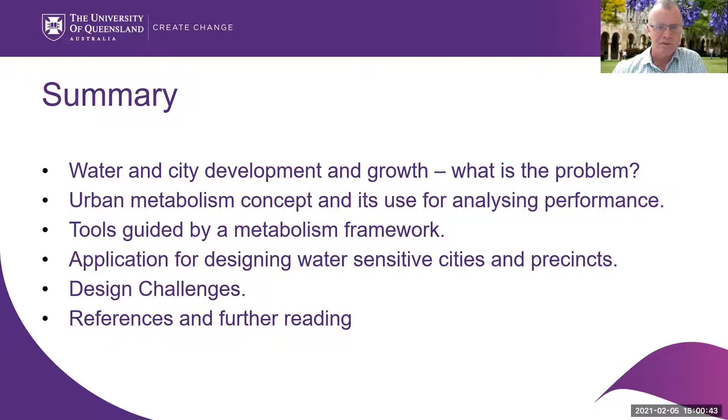In summary, I'd like to talk about water, city development and growth, and what is the problem of water in cities as they're growing. I'd like to talk a little about the urban metabolism concept and its use for analysing performance of cities and how they're managing water holistically. I'd like to talk a little about tools guided by the metabolism framework and its application for designing water-sensitive cities and precincts. I'd like to briefly mention design challenges and give some references if you're interested in these concepts further.

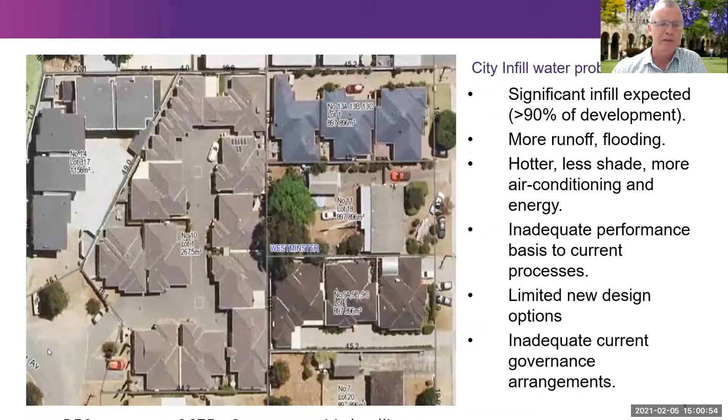So what is the problem of water in cities? I particularly look here at the issue of infill development in cities. Infill in cities is expected to be significant as cities grow and they're constrained on their outer edges by other land uses. In many Australian cities, about 90% of the expected development is infill, more intense use within existing allotments and going higher, etc.

And what that's meaning is increasingly large areas of impervious surface, roof area, road area, driveway area, and less green space, less and less opportunity for water to get into the soil. That makes more runoff, more stormwater runoff, which leads to downstream flooding. And it makes our cities hotter because there's less shade, meaning a need for more air conditioning and energy.

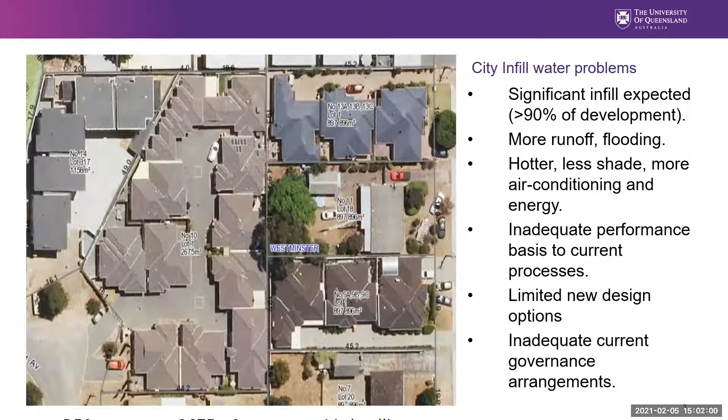And some of the problems we have with this is we don't have in our current urban design and assessment adequate performance bases to assess these designs and developments. We also have limited new design options and inadequate current governance arrangements to really manage this problem, which is continuing to grow. So there are a range of key questions related to this problem.

How can we actually quantify the performance of these cities or subsystems within cities? How do we define that? How do we measure it? And how do we assess it?

For example, across water, energy, and nutrients. What is the impact on hydrology, heat, and livability of new design options? How can best or optimal solutions be found? And how much do we actually change cities if we're changing things little bit by little bit?

There's a related question: so what information is critical to solutions? What technologies suit different typologies or types of households and scale? And how does governance or policy or management approaches work or fail? And how can greater success be achieved?

I'd like to talk a little bit about the concept of urban metabolism and how it's relevant here. A hero in this space is Abel Wolman, who over 50 years ago published a fantastic article in Scientific American about the metabolism of cities.

He published that as a concept to simultaneously deal with shortages of water, pollution of water and air, largely because a lot of energy generation was back within cities and it led to smog and particulate matter, and related public economic decisions. So he presented it as three-dimensional flows of matter through cities: the quantities of water, food, fuel moving into cities, and the quantities of sewage and refuse moving out.

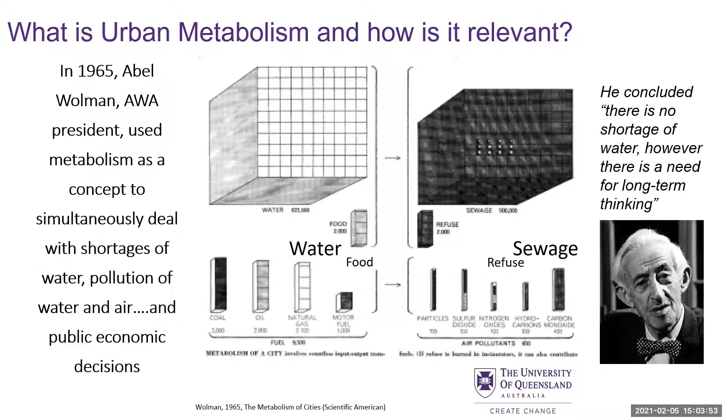That work on metabolism has spawned a whole series of research over the following 50 years. Our application of it is to use particularly the mass balance, the quantification of material flows through cities. And we use that to quantitatively analyse and demonstrate how wasteful and poorly designed our cities currently are.

So this is an example of Melbourne, which is actually a world-leading water-sensitive city back in the time of the Millennium Drought when it was famously running out of water. Back at that time, around 2010, centralised water supplies of around 365 gigalitres, or 365 billion litres of water, were coming in from piped water outside the city. And from that, nearly 297 gigalitres of wastewater was flowing as waste.

The rain falling just on that urban footprint each year was some 1,400 gigalitres, and some 1,200 gigalitres were evaporating from the city. It was only reusing around 31 gigalitres of wastewater, so well less than 10% of its demand.

So we used our performance indicators, which you can see down the bottom, to demonstrate that if Melbourne could be designed to capture and reuse all its wastewater and all its stormwater, it could meet a very large percentage, 81% and 127% respectively. Obviously there's design and infrastructure challenges, but conceptually it's a very large proportion of Melbourne's water supply that could be from within.

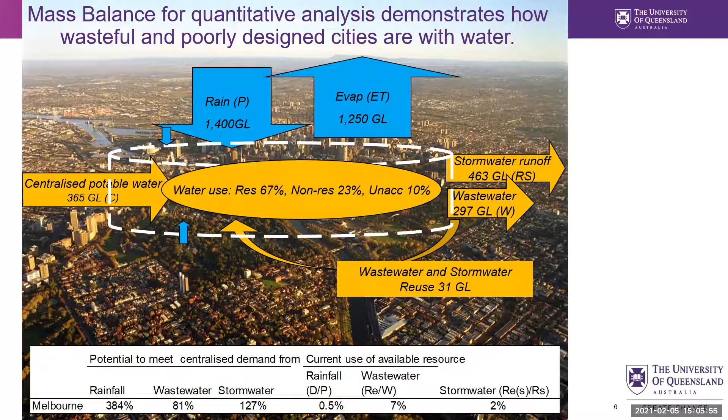So you can see from these mass balance numbers just how wasteful our cities are currently designed with regard to providing water from within, or acting as water supply catchments in their own right.

Before I go further, I'd like to talk a little bit about language - about urban metabolism, urban water metabolism, and water mass balance. So at its broadest, urban metabolism is about all flows of water, materials, and energy through cities. If we look at a subset of that and look at urban water metabolism...

So before we move forward, I'd like to articulate some language: the language of urban metabolism, urban water metabolism, and water mass balance. At its broadest, urban metabolism covers the mass balance, or flow of materials - all materials, water and energy - through cities.

Urban water metabolism focuses on all water flows and the related influence on energy and materials. And some of those related influences are interconnections outside cities or within cities. We hear the term the water-energy nexus - so some energy is influenced by water, and some water is influenced by energy.

If we look at water mass balance, we are only focusing on H2O molecules and how they flow through cities. And over on the right-hand side, you can see the letters C, B, and B, which is performance assessment - so how do we quantify the performance? How do we put ratings on how well designed cities are?

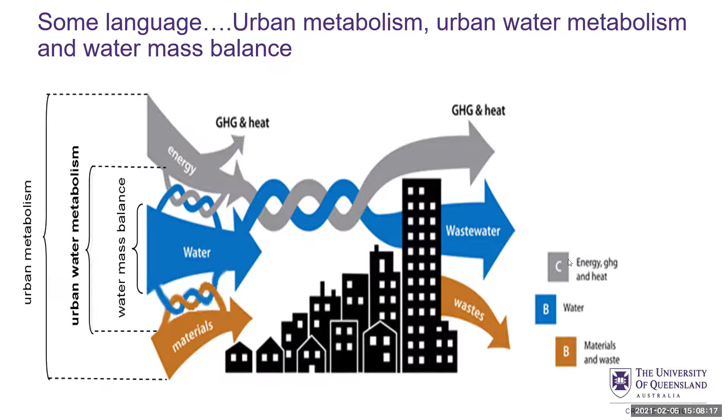Metabolism and mass balance is a fantastic way for doing that. Moving forward, we transform cities and measure their improvement.

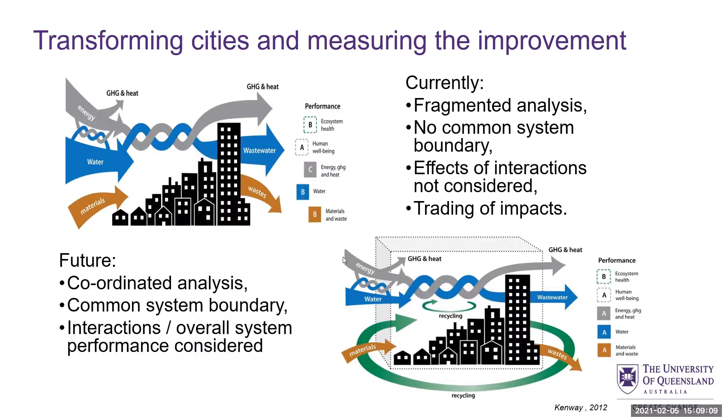The current paradigm is on the top left, where we have energy, water, and materials flowing through cities, but with relatively misaligned performance indicators of ecosystem health, human well-being, energy, water, materials, and waste. They're commonly assessed for cities, but not necessarily to a consistent system boundary. So there's currently fragmented analysis, no common system boundary, the effects of interactions often not considered, and consequently there's trading of impacts. In future, we'd see much more coordinated analysis to a common system boundary, factoring in and accounting for those interactions like the water, energy, food nexus in much more detailed quantification.

The main project I'd like to talk about now is with the CRC Water Sensitive Cities, created by the Commonwealth Government between 2012 and 2021. Water sensitive cities are seen as more sustainable, livable and resilient, very similar to blue cities or sponge cities or other similar concepts internationally. This CRC has over 80 partners in Australia, and we've been fortunate to work on 2 major projects with them.

In essence, a water sensitive city helps provide water security for economic prosperity through efficient use and diverse available resources—really maximising the functionality of water. It enhances and protects the health of waterways, wetlands, river basins, coasts and bays. It mitigates flood risk and damage, and creates public spaces that collect and help recycle clean water.

Here are some examples of water sensitive elements within cities being built in my hometown, Brisbane, in Coorparoo.

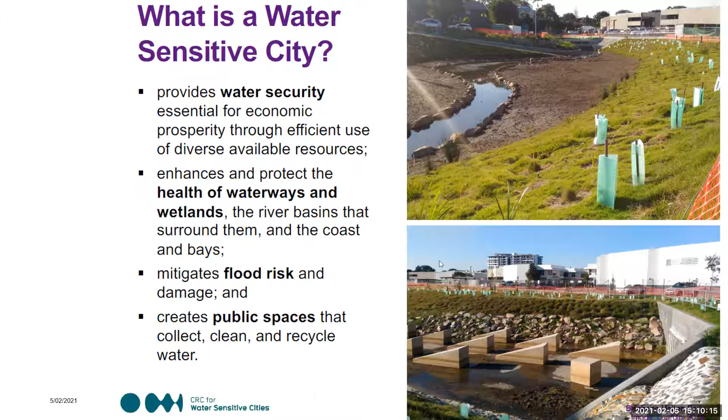As I'm talking about models, I briefly wanted to mention the models used to quantify performance, because that's the focus here—if we can quantify the performance of cities, we can design them better. This is recent work published by our PhD student Mojtaba Moravej, where he reviewed all urban drainage models, urban water mass balance models, and integrated water systems models, looking particularly at tools that cover all of those flows in a mass balance sense.

So all the water cycle flows, including P (rainfall), ET (evapotranspiration), stormwater, recycling, centralized water supply, and wastewater, but also mitigation opportunities—technologies like rainwater harvesting, stormwater harvesting, wastewater reuse, and green roofs. These can also drive performance indicators at different spatial scales from site to precinct to city. He looked at the suitable methods to really evaluate the design of cities.

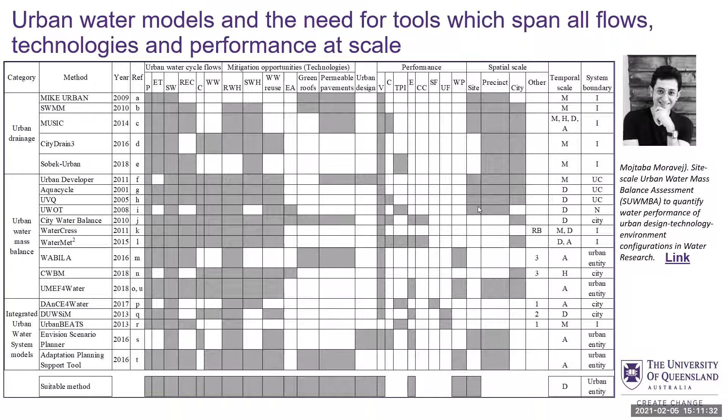These grey boxes at the bottom cover all water cycles and all mitigation opportunities, particularly relevant at site scale, because so much design and development occurs there, applying upwards to precinct scale. Mass balance is so helpful here because it helps unpack a 3-dimensional entity—the design—which interacts with all flows of water. Understanding the mass balance is essential for water performance, very different to doing a mass balance of a 2-dimensional space.

A mass balance needs to look at all inflows to, all outflows from, and all water stored within that particular entity. This is very different to approaches that do a mass balance for a pipe, where all flows into the pipe equal all flows out. Water utilities do that regularly to make sure they're not losing water, or they do it for more complex systems like networks, catchments, or storages.

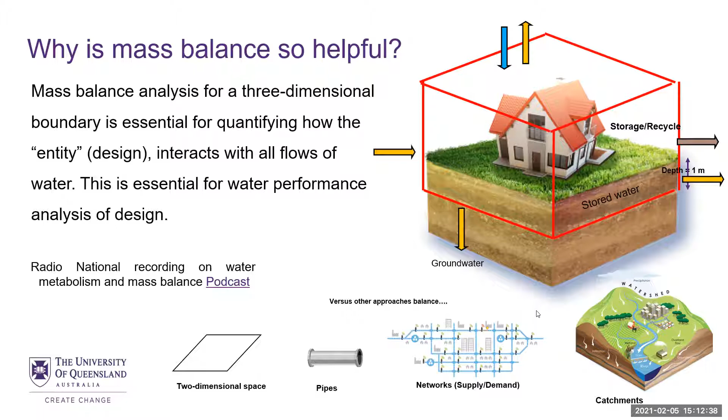But doing it for a 3-dimensional entity involving a building or set of buildings, a landscape with drainage, soil and vegetation, and infrastructure elements like rainwater tanks or pipes, plus human behaviour, becomes much more complicated.

An evaluation framework we've created to assess the performance of cities has been recently published by the CRC Water Sensitive Cities, available on the link. Essentially, the way we evaluate the performance of cities is to define the area and the infill scenarios—we'll talk a lot about the existing state, the business as usual state, and the alternative infill state.

The next step is the definition of the parameters—are we interested in environmental parameters, built form, urban design, or water servicing? Once we have the information and data for those parameters, we undertake an urban water performance analysis, an architectural and urban space analysis, and an urban heat analysis. I'll mostly be talking about the water performance; our colleagues in architecture and microclimate handle the architectural and urban heat analysis, but they are highly interrelated with water performance.

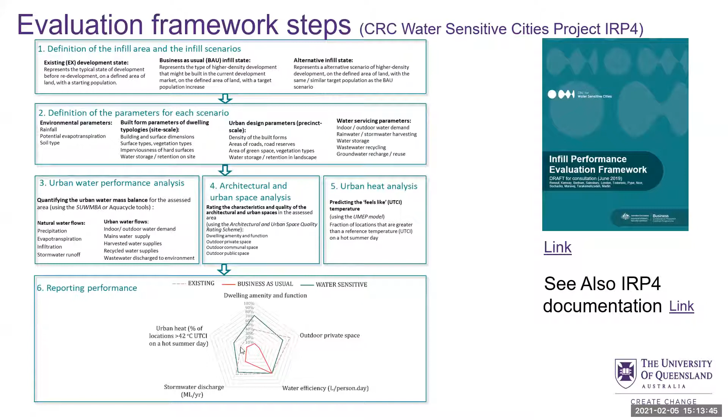We represent these on radar graphs, which I'll describe in this presentation. In brief, the infill performance evaluation framework works through design parameters. Typically planners and architects work with things like roof surfaces, car parking, paved or vegetated surfaces. They look at midpoint indicators of hydrology, water storage, or water resources management, or heat, and then endpoint indicators like infiltration coefficients or evapotranspiration coefficients using different quantified models.

But the consumers, the people who live in these households, are more focused on the right-hand side. They're interested in the outcome for them around livability, water, heat, or amenity. Will it flood? Are there green spaces for children to play? How resilient will it be for drought? How hot is it, and is it a nice place to live in? That's also published on the CRC website, with a link at the bottom there.

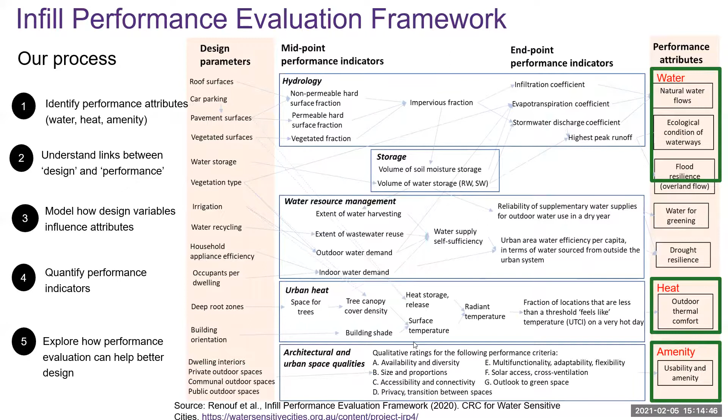So we bring together water mass balance to assess existing, the business as usual, and design. We put a three-dimensional boundary around those cities going down to about 1 metre deep, to characterise the influence of the city and the design, and how that impacts flows of water demand, precipitation, evapotranspiration, stormwater runoff, wastewater, and infiltration.

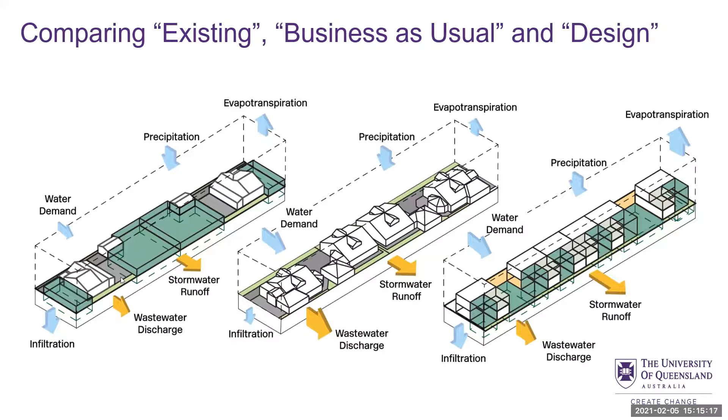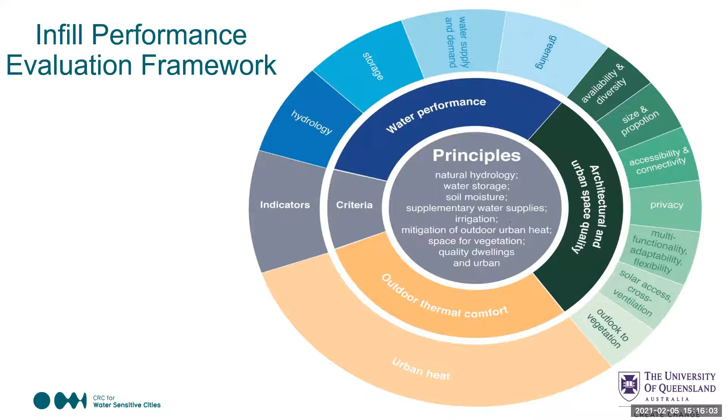The framework has core principles around wanting hydrology to be as natural as possible, storing water, using soil moisture, using supplementary local water supplies and irrigation to help mitigate outdoor and urban heat, space for vegetation, and quality of urban dwellings. There are criteria covering water performance, architectural, and urban and outdoor thermal comfort, and a set of indicators for water performance spanning hydrology, storage, supply and demand, and greening, and architectural quality tracking the quality of interior space, public space, and private outdoor space.

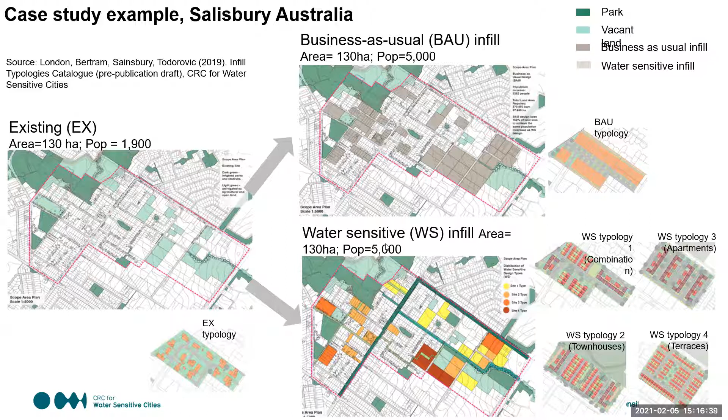We've got case study examples to see the application of that for existing development. You can see here the pink area, an area of 130 hectares in Adelaide, at Salisbury in South Australia. Business as usual, we could quantify which areas were likely to intensify, similar to the earlier slide, and what that would mean for stormwater and urban heat. We could quantify the population for water sensitive infill development, with all cases growing in population from around 1,900 people to 5,000 people.

Then we can compare the performance using the evaluation framework. Here are examples of the numbers: 100% at the outer boundary of the circle is a good number, and 0% means a bad number. Business as usual, you can see its performance with regard to numbers of households, water storage capacity, urban heat, architectural quality, hydrology, greening, water supply and demand is quite restricted, generally less than 50% within this particular framework.

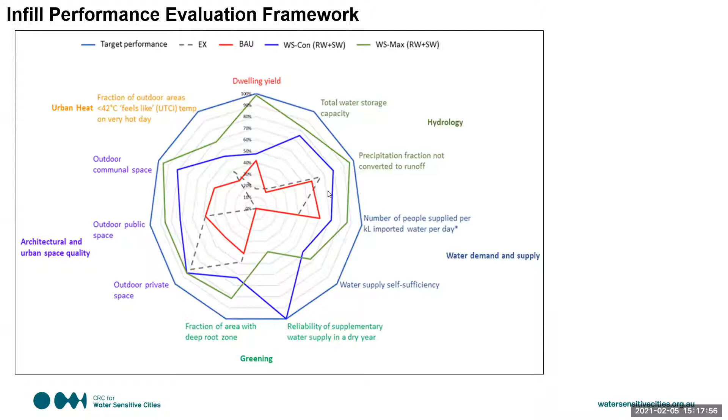When we look at the water sensitive case, red is the business as usual, and the grey dashed line is the existing case, which has a large amount of outdoor private space, a strong performance indicator there. We compare that with water sensitive conservative, which involves rainwater and stormwater harvesting, and water sensitive max, the maximum water sensitive application. We use that to quantify how the performance of that development is improving, then feed that back within architectural and design teams to look at the trade-offs occurring, and how we optimize the design of that development across those multiple attributes.

This has helped us identify a set of principles underpinning the evaluation of water. In hydrology, we want designs to not cause further adverse impact on hydrological flows. We want to restore, ideally, the hydrology towards the natural case. In some cases that restoration is possible; in many cases it's not, but we can certainly stop it deteriorating further. There's a range of performance criteria we can use for that. We can look at water resources efficiency.

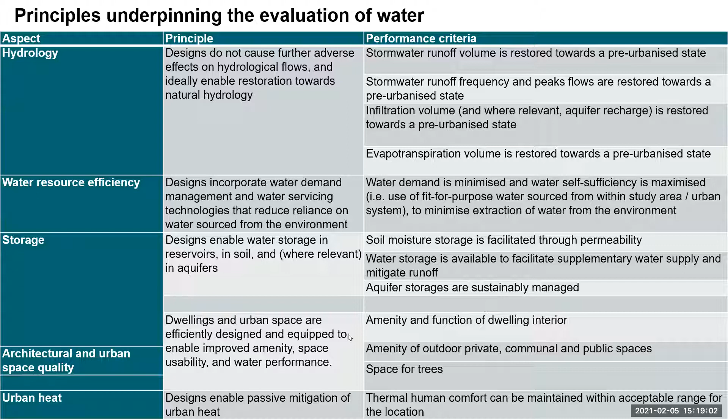Those designs incorporate water demand management and servicing technologies that reduce reliance on water sourced from the external environment and optimize internal or local harvesting of water. Water storage is critical, particularly so that design enables storage in local reservoirs and soil, and that the dwelling and urban space are efficiently designed and equipped to improve amenity and usability. Lastly, design for urban heat enables passive mitigation of heat, which is becoming increasingly important.

We've also found that there are many links between water security and livability. While this shows conceptually the links, we're now working to quantify many of those links in work by our PhD, Beata Sochacka. Briefly, some of the key links between water supply, sanitation, drainage, affordability, river health and risk has key linkages into essential services, green space, utility-owned green space, water quality of natural water bodies, etc. So livability can be very strongly influenced by water.

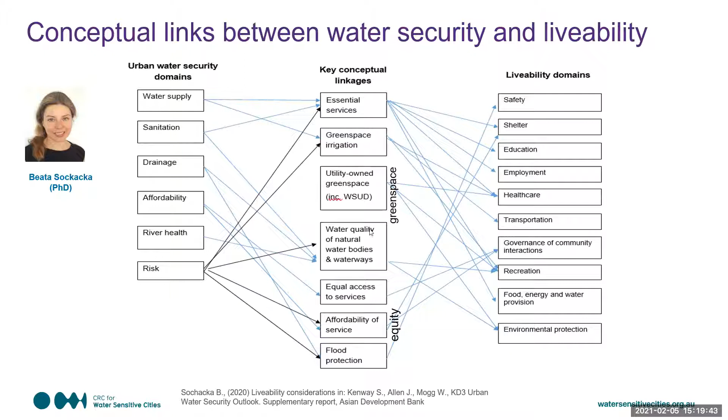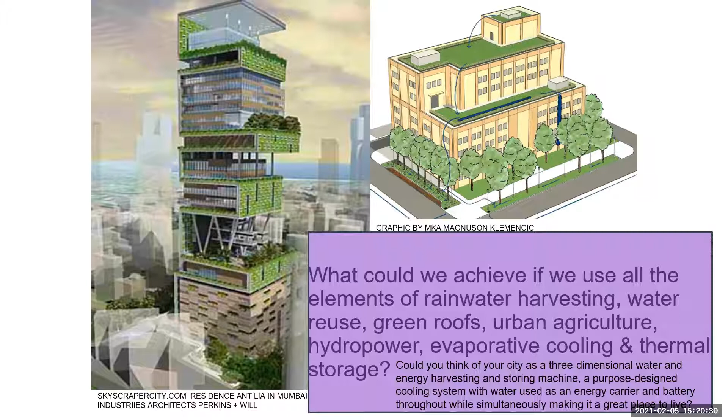When we put all of this together, and particularly when we bring in the water energy nexus, we can start to ask - these are very conceptual drawings of green skyscrapers and cascading water use and harvesting in different level buildings. What could we achieve if we use all the elements of rainwater harvesting, water reuse, green roofs, urban agriculture, hydropower, evaporative cooling, and thermal storage? If we think of our cities as a three-dimensional water harvesting machine, an energy efficiency machine, a purpose-designed cooling system with water used to carry energy throughout while making it simultaneously a great place to live, then we can start to design better cities into the future.

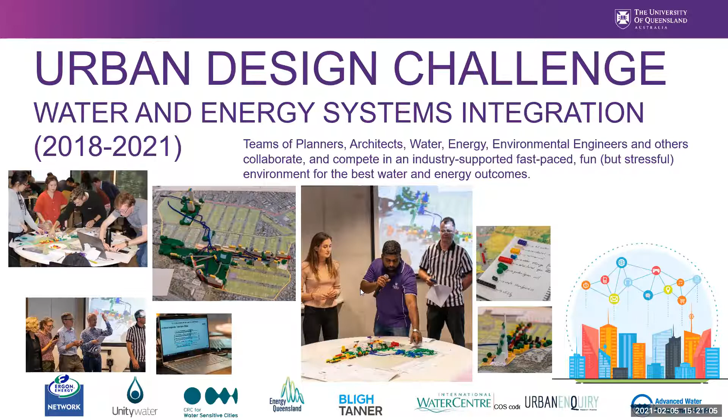At the University of Queensland, together with other partners, we have put together a design challenge that brings together teams of planners, architects, water, energy and environmental engineers and others to collaborate across a week in a fast-paced, fun environment to achieve design solutions. We're using that as an experiment to look at alternative designs, and the students build fantastic designs and market them on the multiple attributes of water, energy, and livability.

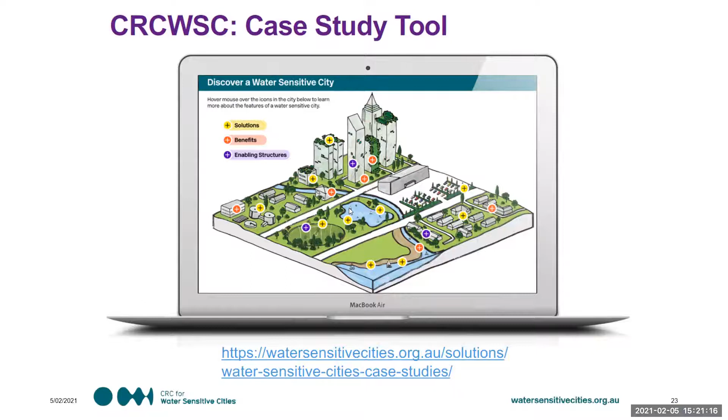There are other tools available too, multiple other tools, particularly the CRC Water Sensitive Cities case study tool, which is available from the link shown on the screen.

To conclude, I'd like to say that our cities are not currently well designed. Parts of them are, but certainly holistically they are not. They're hydrologically wasteful and damaging. Resolving this is a major challenge requiring multidisciplinary inputs from planners, architects, engineers, environmental scientists, social scientists and economists at least, and other disciplines. Water sensitive design, both land use and built elements, can enable intensification, more people living in cities, but also retain or improve hydrology and create more livable forms.

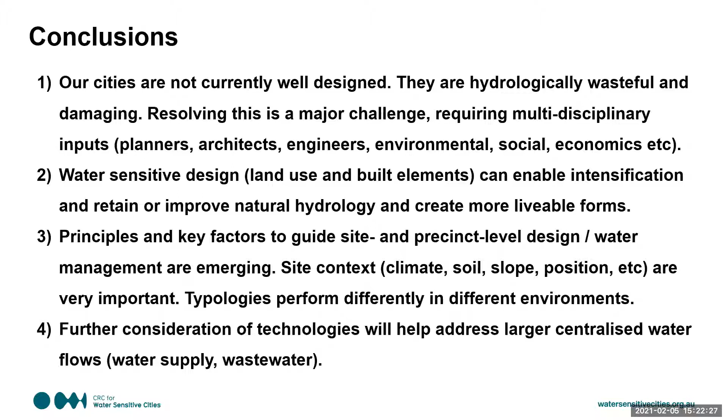Principles and key factors to guide both the site level and precinct level design are emerging. They include site context, climate, soil, slope and position, which is very important. Typologies or designs perform differently in different environments. Further consideration of technologies will help address larger flows of centralized water, because if you're putting more people within cities, you can harvest water locally, but it also puts a further demand on the centralized water system to supply that area.

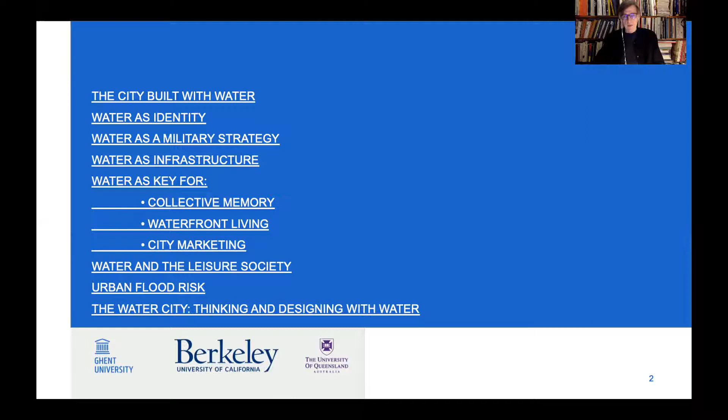Water is here at the origin of the morphology of the city. Ghent is situated on the confluence of two rivers in a marshy lowland, and you can read the presence of water almost in the morphology of the city.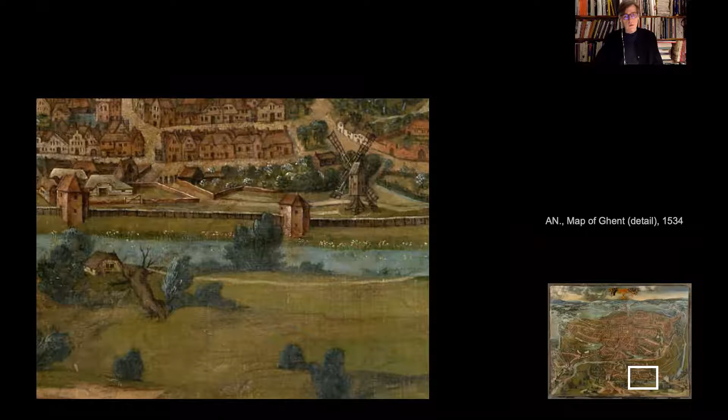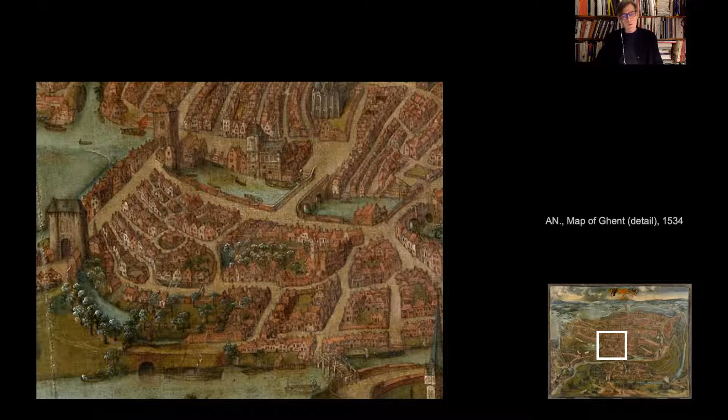This detail shows how water flows under bridges and tunnels, and these bridges can also be gates or fortified gates. So the inhabitants are dealing with water to build their city upon the water.

Another small detail in the map shows how streets run down from the hill towards the water, giving access to the water for domestic use. This is important, so people have access to drinking water or other uses of the river water.

There is a harbor in Ghent. You can see quite big ships here coming from the region, out of the region, into the heart of the city.

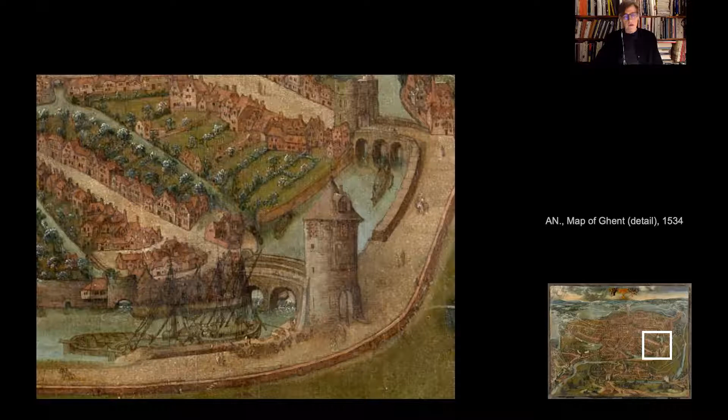But you also have very small ships and boats used for local urban transport and unloading and loading at the steps, as you can see here, of one of the streets in Ghent.

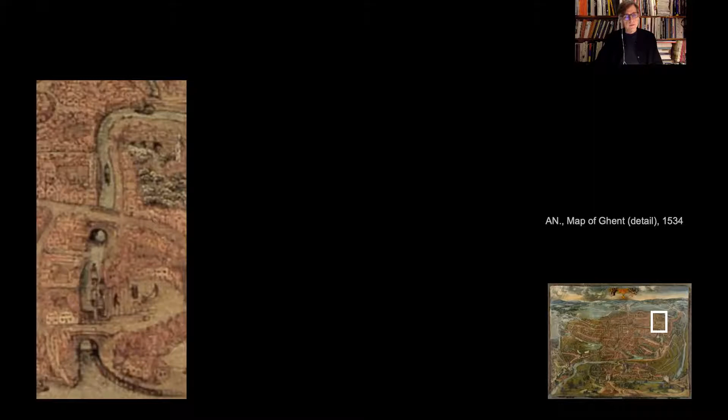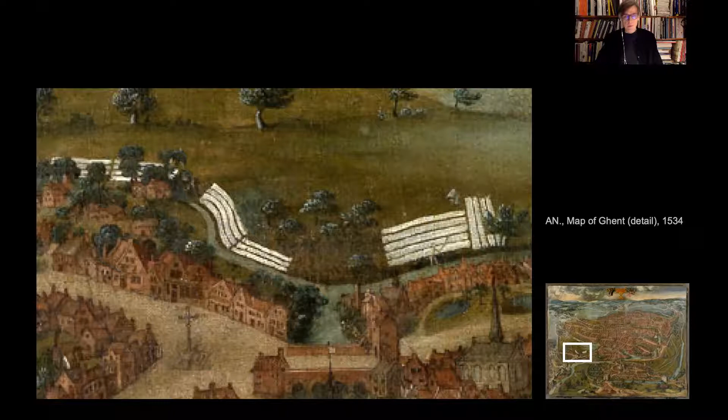The river is also used for washing and bleaching laundry in the meadows close to the river, another type of domestic use. And here, two people are fishing in the river, so it provides not only drinking water but also food for the people living there.

Just to situate the city of Antwerp, which is a large harbor and international port today, but which is not close to the sea, it's inside the land about 80 kilometers. I think it's good to know this. But Antwerp has always been a harbor, at the lower lee side of the river, in the meander of the river.

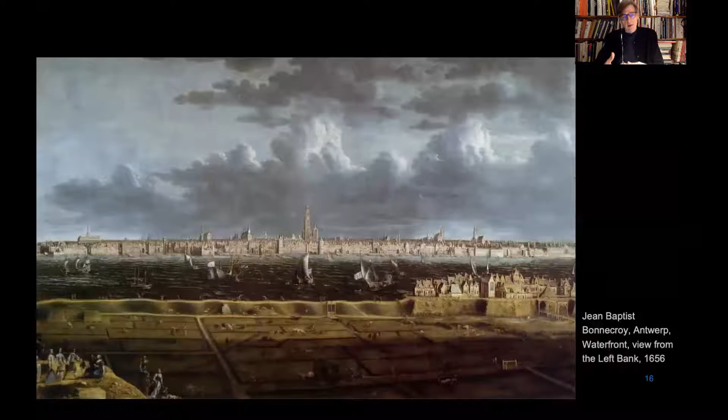Same in this picture: the waterfront side is again represented as the most important side of Antwerp. It's a beautiful picture with a very special light, actually drawn from what they call the left bank, the other bank at the other side of the river, looking over the river towards Antwerp.

What you see here is a division into strips of the painting, with 4 or 5 horizontal strips. The first strip is the agricultural land—we are standing here in Flanders. The river is the border of Flanders with the other region, Brabant; Antwerp was in that time still part of Brabant. So the river is not only a place of harbor activities, but also an administrative border between two important regions. So you have a strip of agricultural land, a strip of the river, a strip of the city of Antwerp, and then a strip with a huge cloudy sky.

At the left side, you see some people standing there, like us, looking at this spectacle of Antwerp. It's a painting of the 17th century by Jean Baptist Bonnecroy.

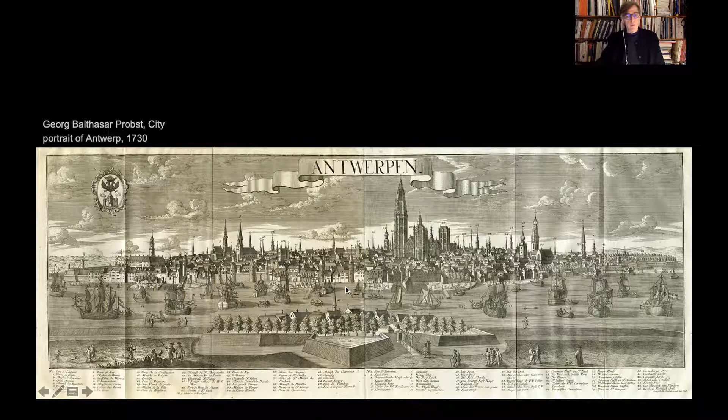In this image, the waterfront of Antwerp is represented in its most glorious way, with all the important ships on the river, huge fortification walls, some new extensions at the left and right sides, and all the monuments inside the city with the cathedral in the center. This is what they call the portrait of the city of Antwerp—an urban portrait that wants to emphasize the presence of the water and the river Scheldt, the birthplace of the city of Antwerp.

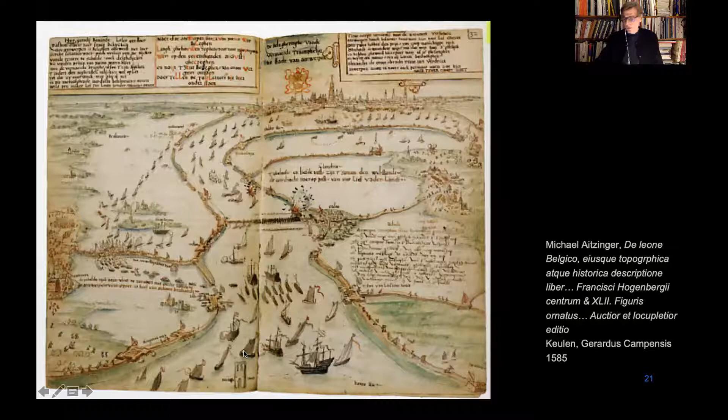The whole surface you can see here is several hundred square kilometers. The ships are, of course, out of scale, and this makes this drawing something very particular. This is the same battlefield, but represented 100 years later by Jan Luyken. Again, you see the city of Antwerp over here at the left side.

This is the River Scheldt, and then all the inundated areas in the polders around the river, where the battle with the ships could take place. Of course, the peasants and the cattle living there were not very happy with these military activities, but that's another story.

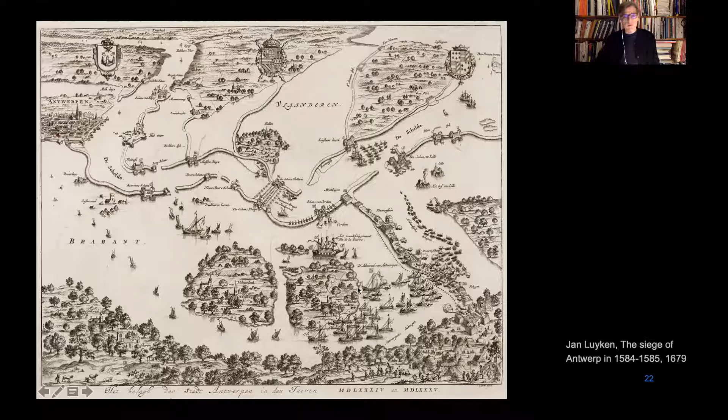Now, using water for military strategy was not so exceptional. I show here at the left side a map of a large part of the Netherlands, what is called the New Holland Waterline. It was a defense strategy for the Netherlands on the east side, because Germany was to the east, and they wanted to defend against Germany in those centuries.

And the strategy was to have a system to inundate large parts of the Netherlands to stop eventual attacks from the east. This system was made out of locks, sluices, canals, and rivers that could inundate large parts here. You can see some of the machines, sluices, and fortifications in the margin of this beautiful map.

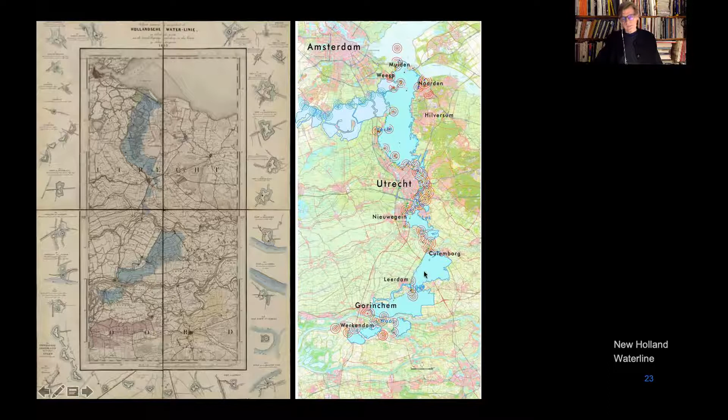I show another example of water as a military strategy. This is in the First World War. The black line in the center is the front line between the German army and the Allied armies. At the border of Belgium, this is the last strip still under Belgian control. The Belgian army is over here, the British army over here, and France starts over here, running down until Switzerland.

But what is particular here is the inundation. It's the same tactic, to stop the army by inundating land. This was a peasant's idea - he opened the locks and sluices in Nieuport to let the North Sea water come in and inundate the polders.

The picture you see here is right after the First World War, with the battlefields still muddy and the water going away. It's a picture taken by Jean Massart, a botanist extremely interested in this phenomenon of salted water taking over the polders, and what types of plants would start to grow there after this strategic inundation.

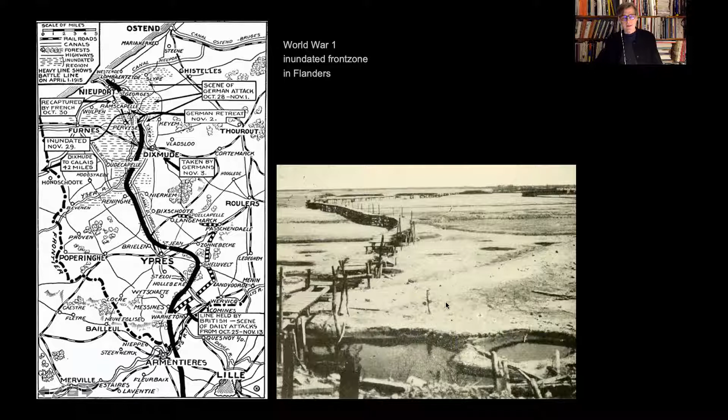Let's have now still another look at water and its relationship to the city. We are again in Antwerp. It's a map showing the whole waterfront of Antwerp. This is the River Scheldt, this is the city of Antwerp. This is a new extension with new docks, and another extension under Napoleon with new docks at the north side, and this is the south side. Now if you look close, you see some lines, and I will show a detail.

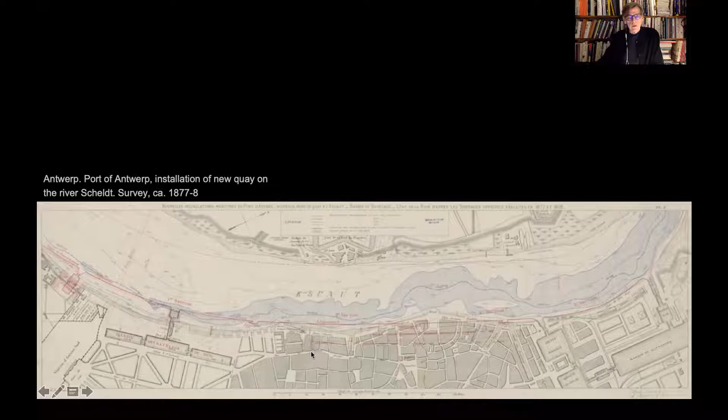This red line and this dotted line are the new alignments of what the city of Antwerp wanted to construct - namely a new quay in front of the city, because the old system of canals going inside the city had become old-fashioned and not functional anymore, and only smaller ships could enter. So they wanted to master the water of the river so that big ships could come against the quay alongside the city of Antwerp.

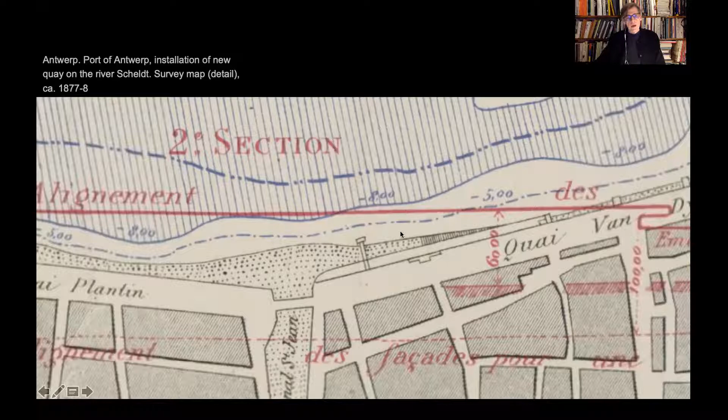So this was again the same alignment of the new quay. You can see what a huge part of Antwerp had to be demolished to build these quays in front of the city. And so you can see how the harbor activities and the water as a kind of infrastructure was taking over from the water as a kind of natural flowing river.

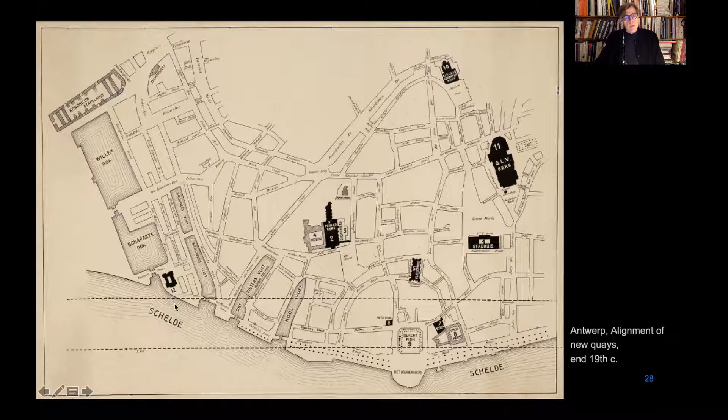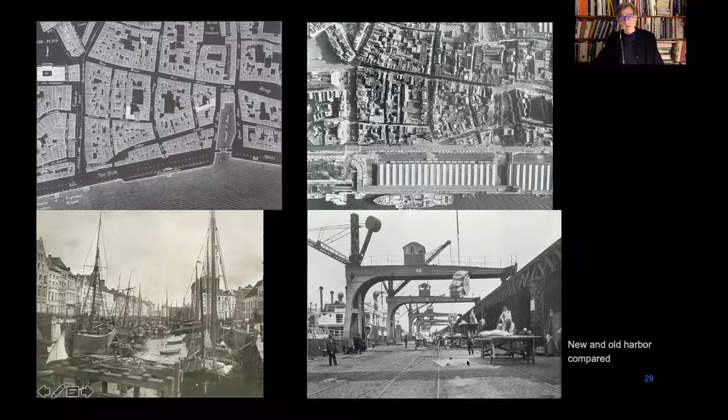This is the old fabric and old morphology of the city of Antwerp, and this is what came afterwards. You can see that these new quays with open warehouses and a completely linear, very rational open surface in front of the city have taken over lots of this urban fabric. The canals and basins going perpendicularly in the city with this type of ships are replaced by the new quays and this type of industrial activities with huge ships alongside the quays.

So the harbor, which was situated in front of the quays and a little bit in the north and south, became a kind of international port - the port of Antwerp - which has nothing to do anymore with the city or inhabitants of Antwerp. So in a certain way it became a kind of abstract zone for the people living in the city, and the city itself lost the harbor that had been situated in front of it for centuries.

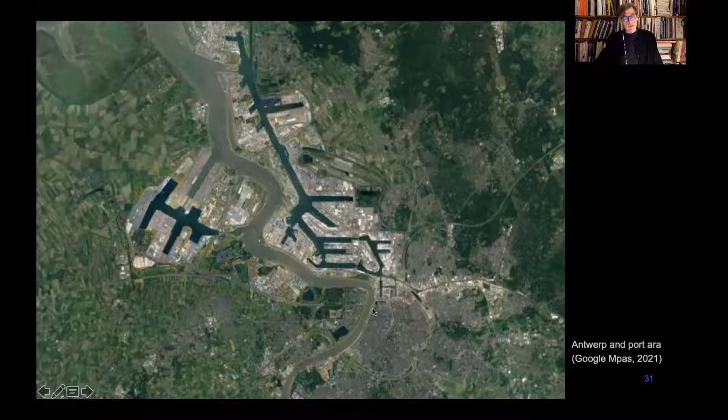That's also the reason why some inhabitants at the end of the 20th century, 20, 30 years ago, wanted to renew the river and the relationship between the city and the river. So they started an international competition for urban design where three parts of the city were the topic: the older harbor of the time of Napoleon, the quays in front of the river, and a third zone we are less interested in.

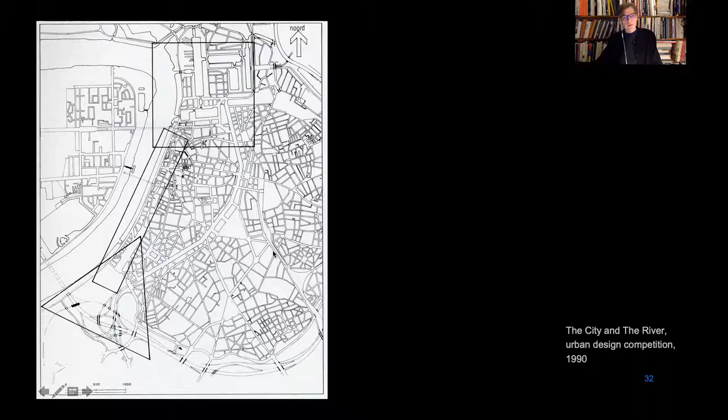This competition was very international and was won by Manuel de Sola Morales from Barcelona. He proposed for the north part of what they call the islet some new beginning of an urban neighborhood. Before, it was a complete harbor neighborhood, but he wanted the city to penetrate and take it over, so he foresaw some cultural activity here, then living towers alongside the basin, and some new types of housing.

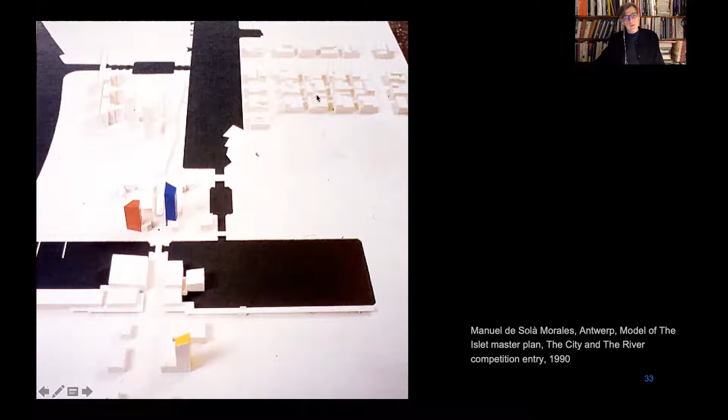That was very successful, and in the last 30 years this zone of the harbor from Napoleon's time has been taken over by new apartment buildings, a new cultural museum, a huge museum, a new park, new housing, renewal and renovations, and a harbor for leisure ships and yachts. So the city of Antwerp is now discovering, in the last 20 years, this part of the city that was previously unknown.

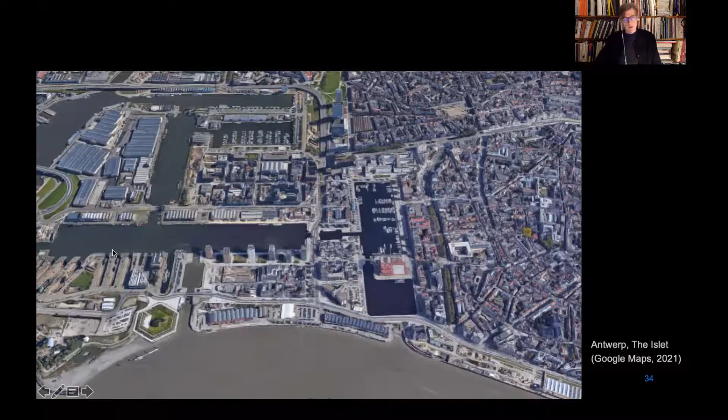It also changed the representation and image of the water itself, because where the water was once a kind of infrastructure for the harbor, it has now become a kind of attraction and attractor for leisure activities, for walking, and also just for an aesthetical experience. So the water now has a completely different kind of image.

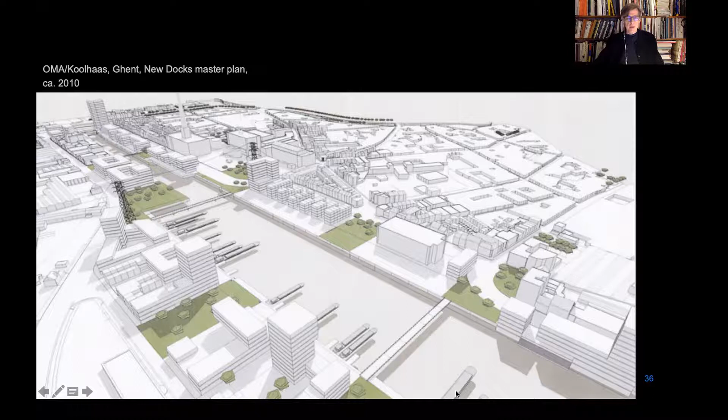This is in Ghent, a plan made by the famous Dutch architect Koolhaas and OMA, and it's now under development. Lots of new apartment buildings are being built in Ghent as part of this waterfront development, which is a kind of new generation of the water relationship for many cities all over the world.

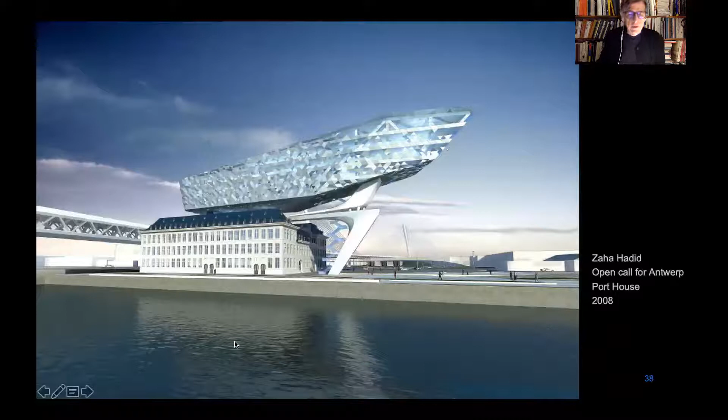In Antwerp, this may be a very good example of how water, and the proximity of water, is also very positive for the development of city marketing buildings. This is a building made by Zaha Hadid, finished in 2016. It's the Port Administration House, built on top of a former fire brigade building for the Port of Antwerp.

The administration wanted a new building, which has now become a kind of symbol for the harbor of Antwerp and for the whole city, as it represents the body of a ship and also a cloudy sky reflected in the mirroring glass, but it also reflects the diamond industry, which is very famous in Antwerp. So you see how the water and other elements of Antwerp are used in this city marketing building to promote the harbor, the diamonds, and tourism for the city.

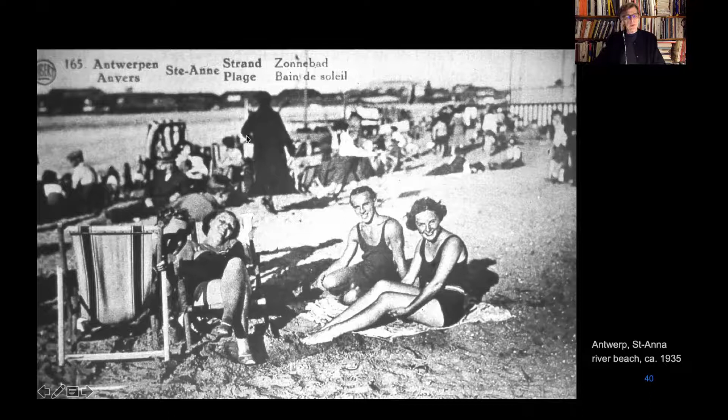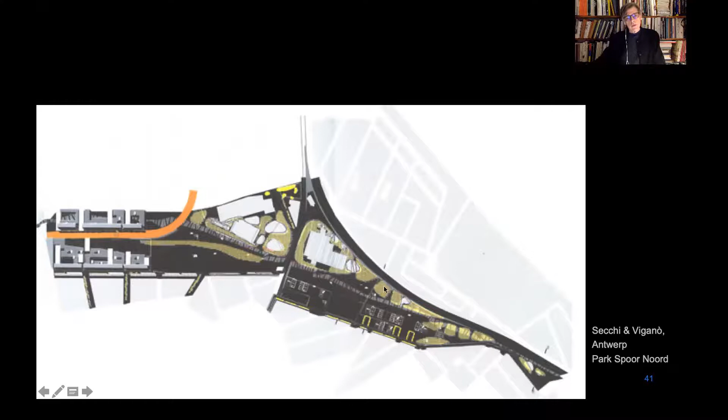But maybe also overcrowded, and that's one of the reasons Antwerp is developing new parks like this one, built on top of a former railway yard. It's designed by the Italians Bernardo Secchi and Paola Vigano. It's not only a popular park but also has a kind of beach foreseen within it, and you can see how popular this is. Again, this shows the proximity of water and the image of a leisurely place that water suggests by its presence.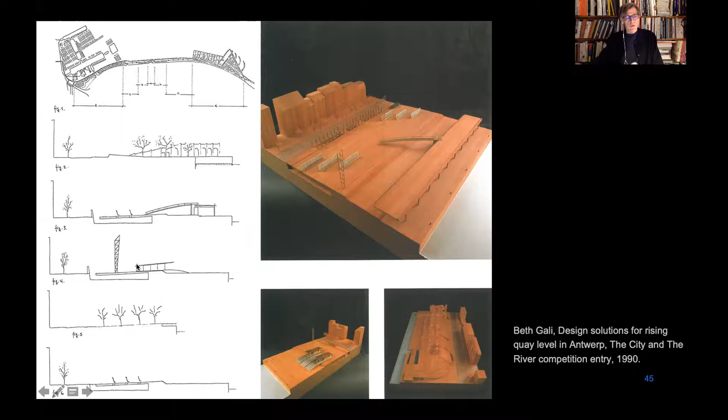That's why during the city and river competition in the 90s, a lot of designer attention went to how to resolve protection of the city while keeping it an interesting place. Now that industrial activities are gone, this became a beautiful, empty, large zone in front of the city, and designers wanted to keep this place and offer it to the inhabitants. You can see here in the prize-winning project of Beth Gali some of the solutions she invented for raising the level of protection while keeping the interest of the quay.

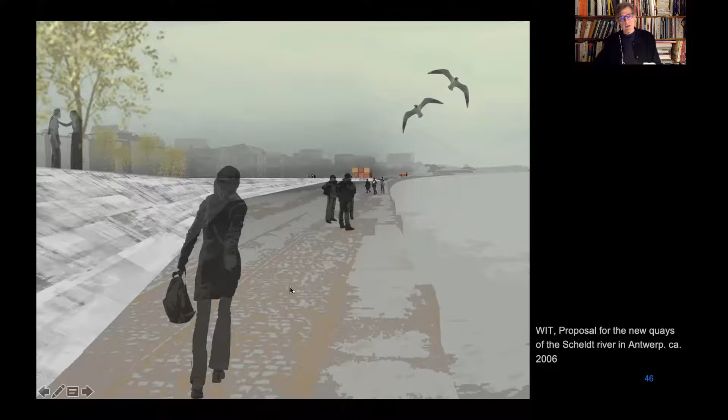Beth Gali didn't actually get the implementation of her project, but 20 years later it was taken over by another design group, WIT, who continued more or less the same type of approach. They wanted to keep this zone in front of the city and give inhabitants a free space to walk. Now the problem when you raise the level of the quay...

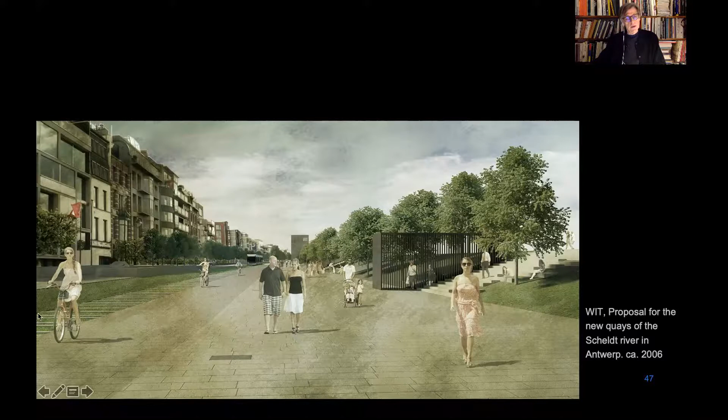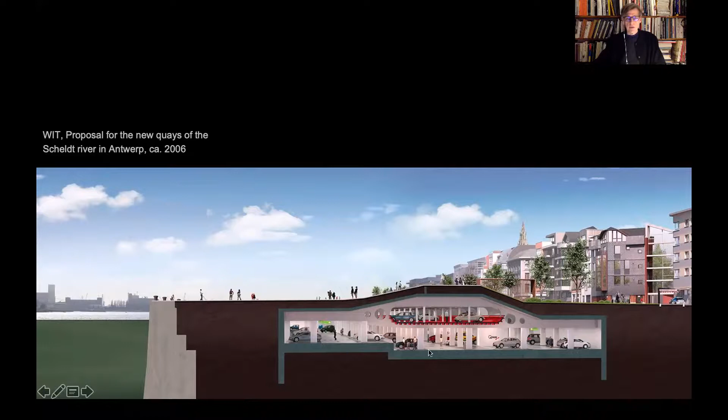Or when you put a dike on top of it, the problem is that you block off the view of the river for the inhabitants of the city, as you can see in this image. So the solution was to put the dike in the middle of the quay, so you have a walk and car zone at the side of the city. That's what you see on this side. And at the river side, you still have an open zone with a beautiful open-air walking space, with a parking lot underneath.

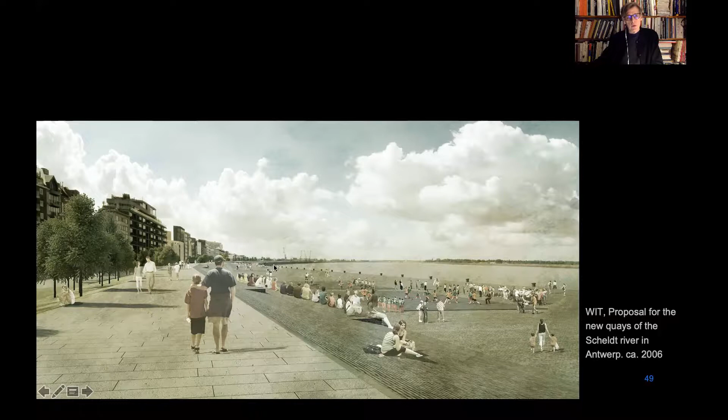This is more or less the effect of what they were opting for. It's a beautiful walking space on top of the dike that slopes down smoothly towards the river, creating huge proximity to the water for this open zone close to the river. This is a contemporary picture, very recent, of that zone, showing how beautiful the space is and how smoothly people can walk from the dike towards the water. So the city of Antwerp now has very good protection for the future, and at the same time a new beautiful walking zone.

I want to finish very shortly with some words about a new plan for Antwerp, because Antwerp is a kind of water city, like many cities in that region such as Ghent and Bruges, and also in the Netherlands. So Antwerp started a plan for the water city, foreseeing three types of water.

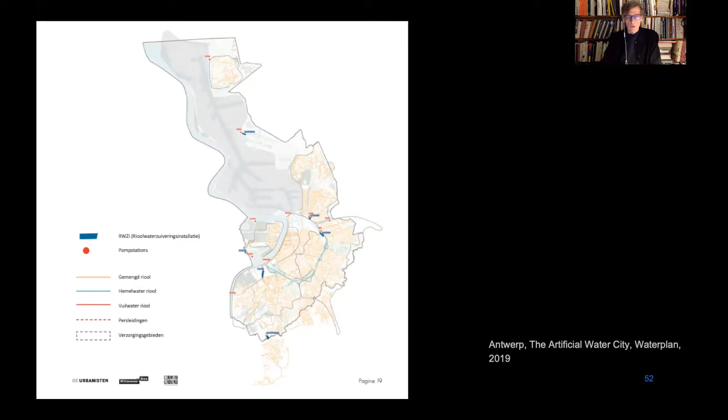One type is the artificial water city, referring to all the artificial mechanisms and machineries made to master water in a big city like Antwerp—all kinds of pumps, sewers, pipes, sluices, and similar things.

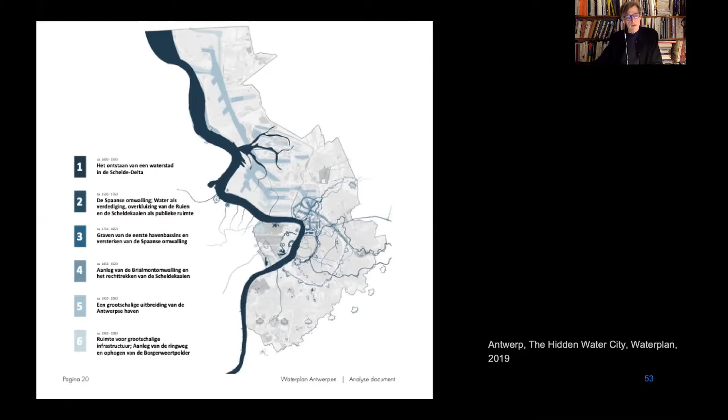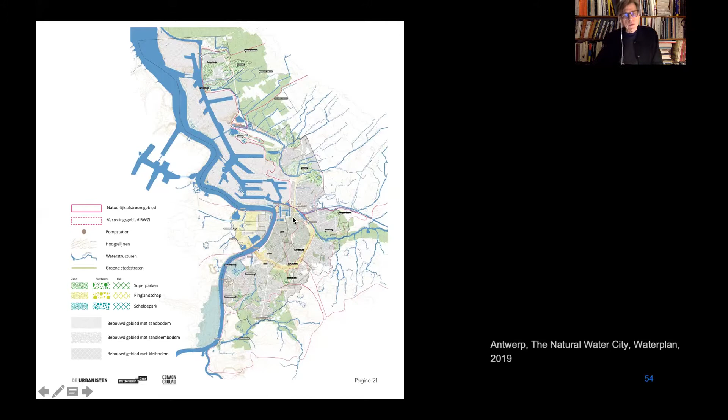So this is, in some images and a few words, different approaches of the city and its relationship to the water. I thank you very much, and I will welcome all kinds of questions if there are any. Thank you.